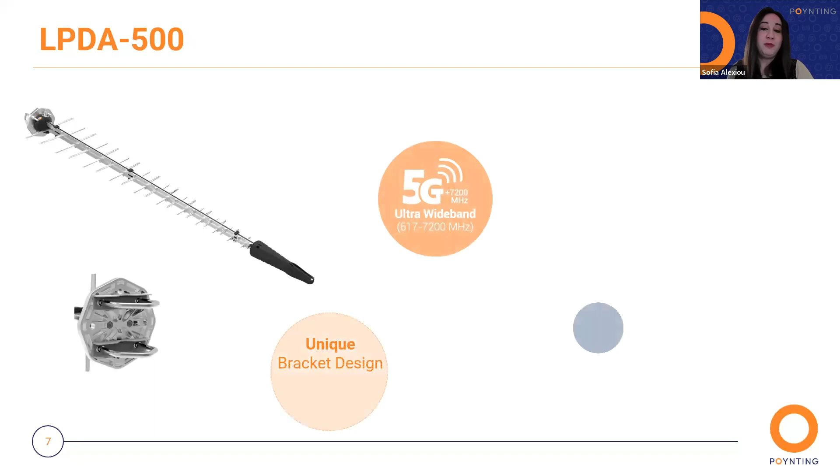Okay, so I would like to introduce you to our new LPDA 500 antenna. The LPDA 500 is a really big antenna. The LPDA 500 comes standard with a new improved mounting bracket, which can be rotated at 45 degree intervals, across all frequency bands with an 11 dBi peak gain.

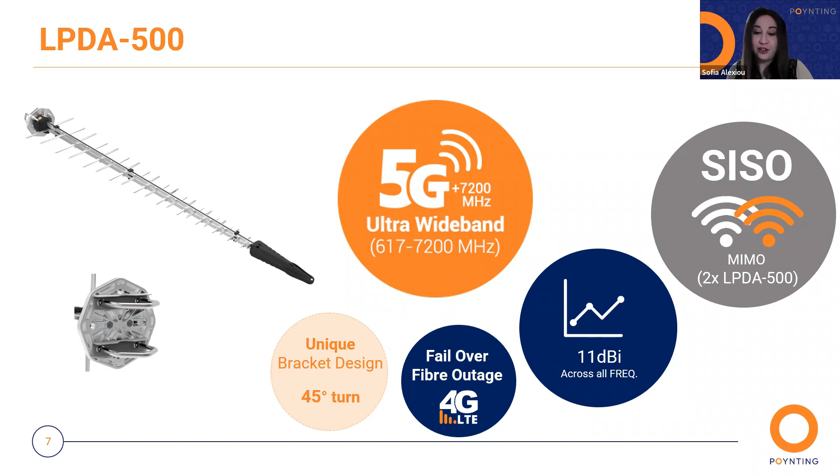So this allows easy installation, and the customer will be able to mount multiple LPDA 500 antennas and orient them in a MIMO configuration, like vertically or horizontally, or plus or minus 45 degrees. Now, Poynting antennas are well known for their design and for future-proof antennas, and the new LPDA 500 is no different at all. Okay.

The antenna applications. Which are the applications for the LPDA 500? We will talk about the main application areas. We have water wells. Think how critical the infrastructure of water wells is, and how important it is to have connectivity in this kind of application. And of course, houses and cottages in the mountains, where connectivity is always necessary. Of course, farming, agricultural, industrial and commercial LTE and Wi-Fi deployments.

Now, here we have the LPDA 500 selling points. The LPDA 500 is an ultra-wideband antenna, works from 617 to 7200 megahertz. It's a leading product with 5G. It has exceptional high gain performance over the entire frequency range.

It's mainly a SISO product, but can be converted to 2x2 MIMO by combining two LPDA 500s. Of course, Wi-Fi enabled with a gain of 11 dBi, and is ideal for failover of fiber outage caters for LTE, 4G, and 5G. And of course, the unique innovative bracket that allows 45 degree installation turns. Okay.

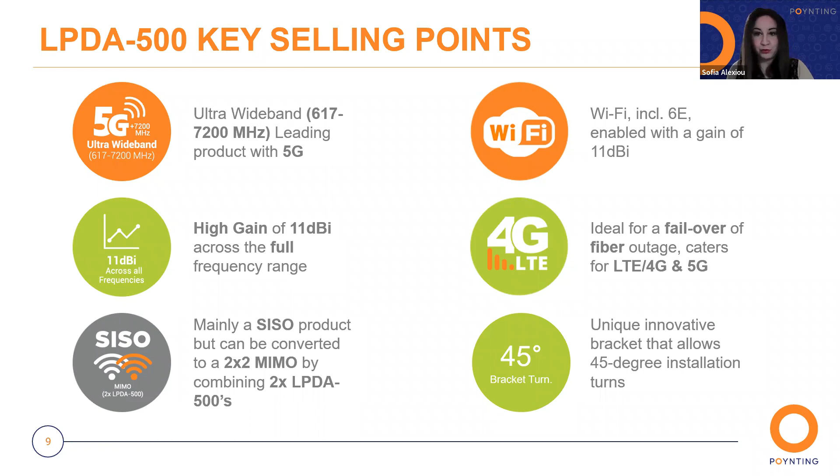Which are the LPDA benefits and features? So, our new antenna has a really flexible installation. It's lightweight and has a rugged design. The narrow opening angle reduces noise. It's long reach, it has a high data throughput, supports latency, and it's really suitable for so many technologies like Wi-Fi, cellular, LoRa, helium, and more.

So here we have the mechanical data. The mechanical data, as we can see now how really big the LPDA 500 is. The LPDA 500 is 1 meter and 382 millimeters in length. Everything is uploaded on our website, so you are able to see all the datasheets.

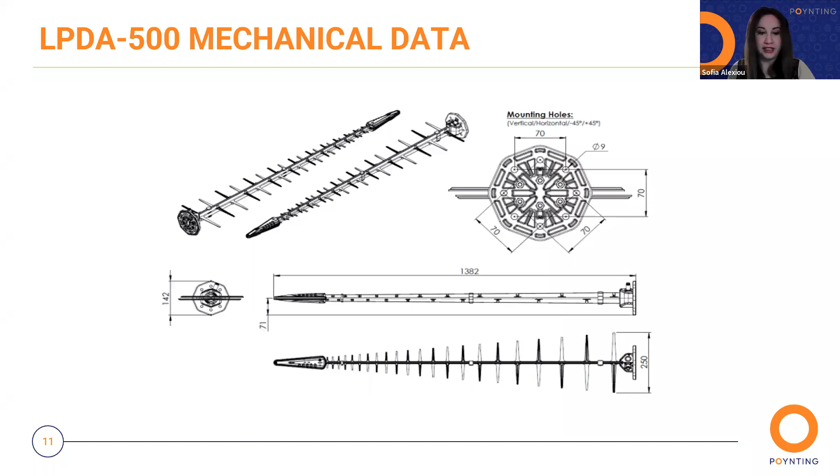Price and availability. The price for the LPDA 500, the MSRP price, is 199 euros. It comes with master boxes. Each master box contains 4 antennas inside, and yes, we have it on stock. So we will proceed a little bit more.

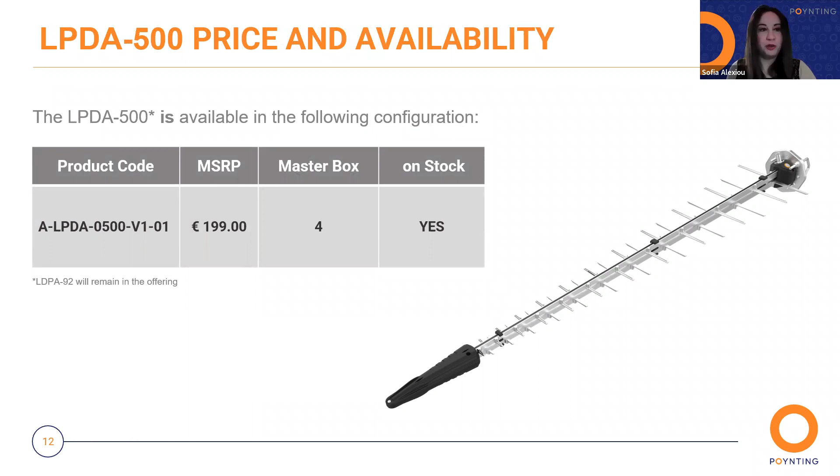And I would like now to talk about our new Omni 785 antenna. The Omni 785 is ideal for urban and rural applications. It's an omnidirectional dual-band Wi-Fi antenna which ensures a strong Wi-Fi connection with improved transfer speeds for your router or modem.

The antenna covers 2.4 gigahertz and 5 to 7.2 gigahertz Wi-Fi bands with a peak gain of 4 dBi across the bands. The antenna is ground-plane independent and can be fitted directly to any equipment that uses an RP-SMA connector. So this allows the antenna to be connected to any wireless access point, whether it's an older Wi-Fi technology or dual band Wi-Fi technology.

The antenna can, of course, be used to resolve channel saturation and provide the ultimate Wi-Fi performance and flexibility. The knuckle base of the antenna allows multiple angle deployments to accommodate the orientation of the equipment. So we will forward a little bit.

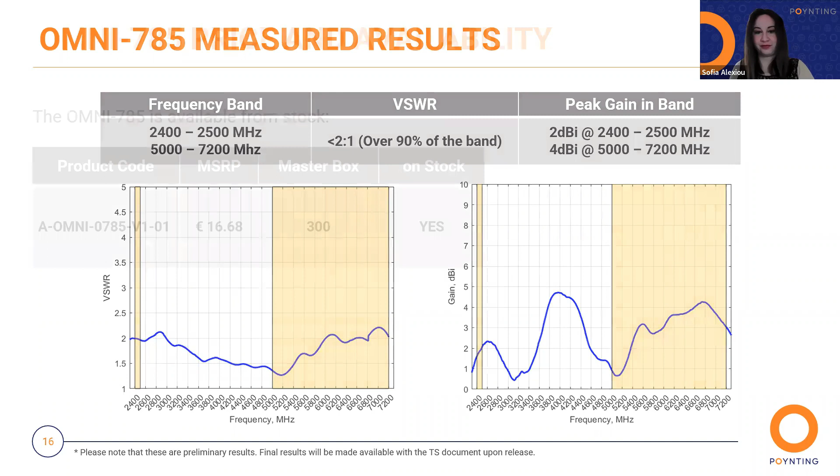Here we can see the measured results. We can see the frequency bands, the VSWR, and the peak gain. Again, these are real measured results. Regarding price and availability, of course, we have it on stock. The MSRP price is 16.68 euros, and each master box contains 300 pieces.

Now, we will move on to the next presenter, Mr. Hugo Carvalho. Thank you. Hello. Thank you, Sofia. Let me start sharing my screen real quick. Okay, you should all be seeing my screen right now, and my mic is on. Okay, good morning, everyone. I hope you're all keeping well.

I'll be talking about HELI antennas, even though I know most of you haven't done much with HELI antennas in the past. Our portfolio and the existing technological landscape were also kind of narrowing down the use cases and applications, and this means narrowing down the addressable market as well. But this is changing now.

So even if you haven't done projects with HELIs in the past, I would like you to stay attentive for the following minutes, where I hope to trigger you to think about the potential opportunities within your customer base. You might have some low-hanging fruit even in your contact list. We will address who these customers are and what projects these antennas are built for. So keep an eye out for it, because even though you haven't done it, you may do it in the future.

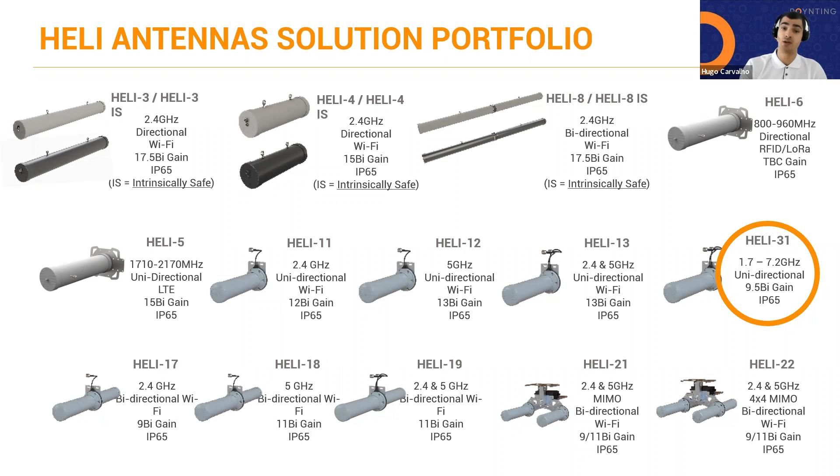The HELI 31, as you can see from this slide, was already kind of the odd one out from the traditional HELI portfolio. While most HELIs cover Wi-Fi frequencies, the HELI 5, the 6, and the 31 don't aim at only those frequencies. The HELI 31 does Wi-Fi and much more. It covers every single frequency from 1700 to 7200 megahertz, and this makes it a very appealing antenna for dual band Wi-Fi deployments whenever the Wi-Fi access point has dual band concurrent connectors, and does so all the way up to Wi-Fi 6E. So this is also a differentiator in terms of frequencies comparing the HELI 31 to the other Wi-Fi HELIs, but it also covers a lot of the frequencies where both private and public 5G networks are going to be deployed.

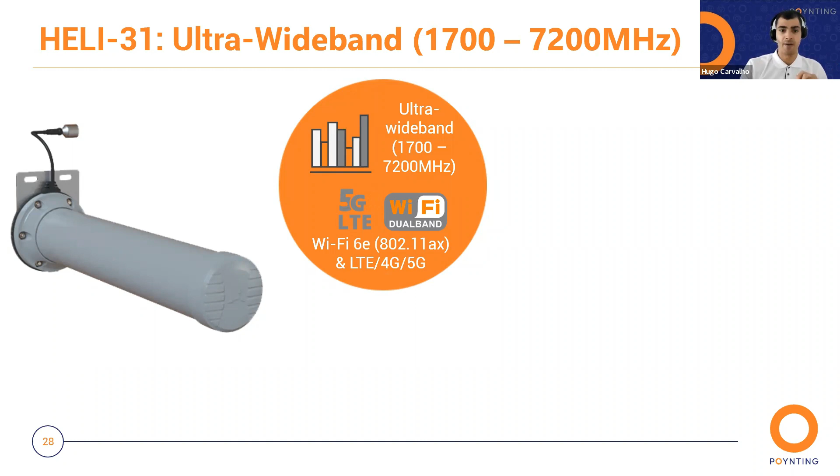As you'd expect from a HELI antenna, it is circularly polarized. This one in particular is unidirectional. You can get it in left-hand and right-hand polarization, and it's IP65 as the rest of the mini HELI antennas.

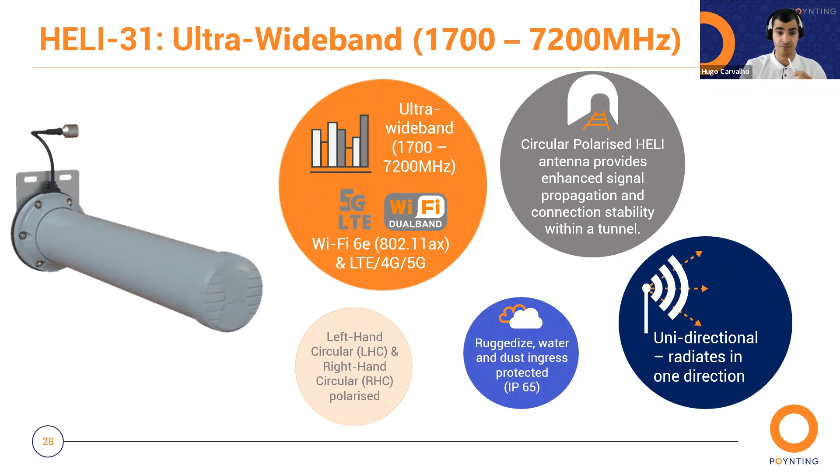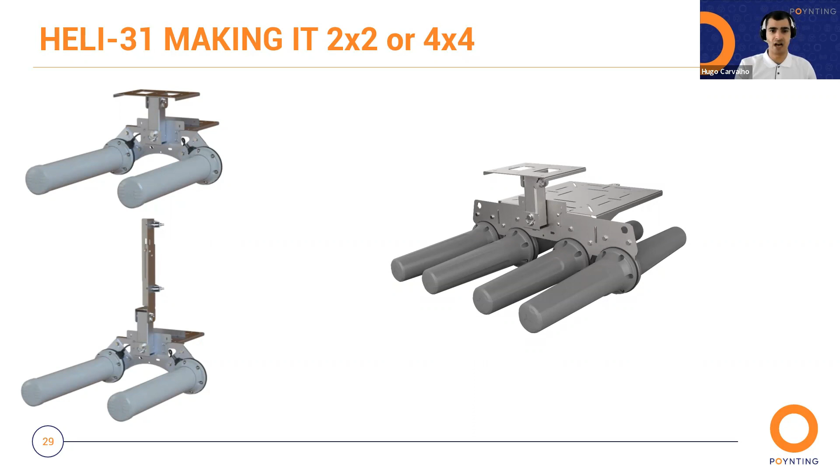It's compatible with the mini HELI brackets, and this means that you'll be able to create a MIMO setup out of this SISO antenna using the brackets 45 and 47, which you can see to the left of our slide here. You'll be able to create a 2x2 MIMO solution. But if you use the bracket 46, which we also launched a year and a half ago, you can actually create a MIMO 4x4 setup. Of course, these antennas that you see on the bracket 46 are not the HELI-31, they are the HELI-19, if I'm not mistaken.

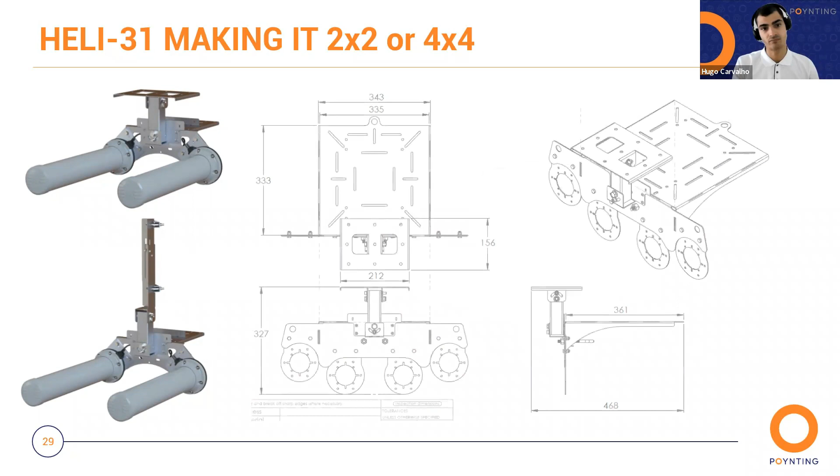In terms of purpose and key selling points for this antenna, again, it's a HELI antenna. It finds its space in the mining and tunneling vertical, meaning that we expect it to be mainly deployed in mines and tunnels, whether they're being constructed or in operation, for metro or train tunnels, for road tunnels, again, for operation or service of those road tunnels. So if it's underground and needs wireless connectivity on these frequencies, this will be a good product to solve it.

From a technology standpoint, it will be used with any radio communications that exist in the 1.7 to 7.2 gigahertz range. The most deployed technologies on these frequencies are dual-band Wi-Fi and private 5G networks. And I say private 5G networks, not public 5G, for this antenna in particular, because there are requirements in terms of power handling capacity, or in terms of low PIM, for antennas that do public 5G and public 4G deployments. And this antenna is not really there. So that's why we have the HELI-33 that I'm going to talk about in a few minutes.

In terms of unique selling points, these are, of course, circularly polarized Poynting antennas, so it is better prepared for data-first applications than leaky feeder or linearly polarized antennas. So this is the first argument, and I invite you to study, and if you want to know more, reach out to us on the differences between leaky feeder, linearly polarized antennas, and circularly polarized ones. But all in all, the technical differentiators will ensure better network coverage, leading to lower latencies, higher bandwidths, fewer connection drops, fewer access points needed, fewer points of failure, ultimately lower operating frustrations and better user experience.

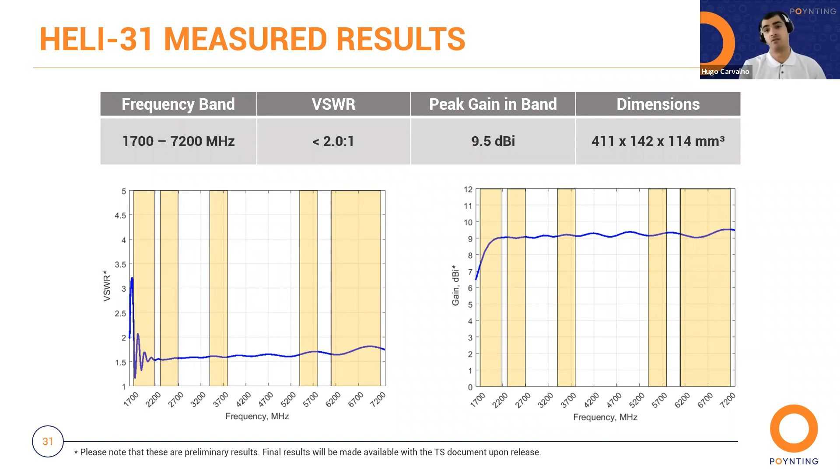And from a mechanical point of view, it's a bit longer than our traditional mini HELIs. And by traditional, I mean the 11, the 12, or the 13, the V2s, namely. So this one is 41 centimeters long, and the mini HELI V2s were 31 centimeters long. Regarding mounting options, as I said, you can mount them on the bracket 45, 46, 47, or just using an L bracket. This antenna is also a bit heavier than the mini HELIs. It weighs 1.2 kilos instead of 800 grams like the other mini HELIs.

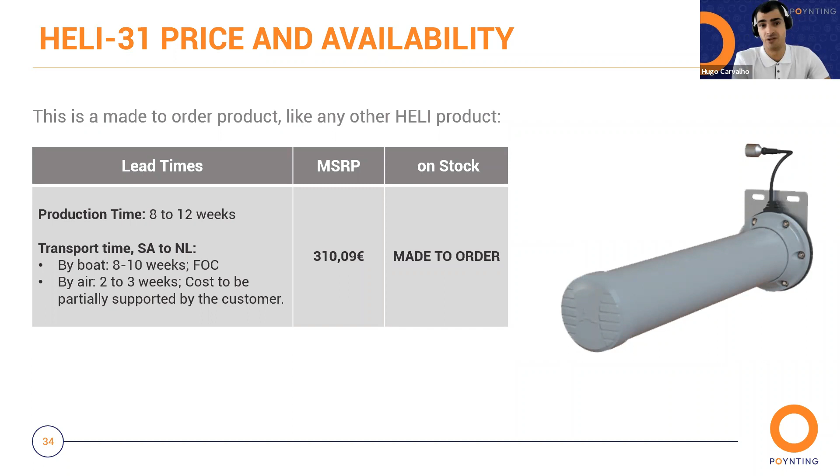Like with any HELI antenna, it's a made-to-order product and has a production lead time of 8 to 12 weeks, depending on how busy production is, on the availability of raw materials, and how long it will take us to source them. Our HELI antennas are always manufactured in South Africa. And then transport time is between 2 to 10 weeks, depending on whether we're sea freighting or air freighting them. And the MSRP is around 310 euros per antenna.

So now on to the new antenna, the HELI-33. This is still a prototype stage antenna, so this is not a fully industrialized product. We're busy manufacturing more prototypes already that we're going to test in some POCs here in Europe in the next couple of months. In any case, the reason why we're coming out to you with this antenna, and we don't want you to at any point be selling a PowerPoint, is because we have created prototypes already. We have tested those prototypes, and we are very, very happy with what we have seen. So we're very confident to let you know about this antenna and to allow you to go out there and start promoting it and creating the demand for it. We'll talk about how long it will take us to create prototypes, so you'll have the full information with you.

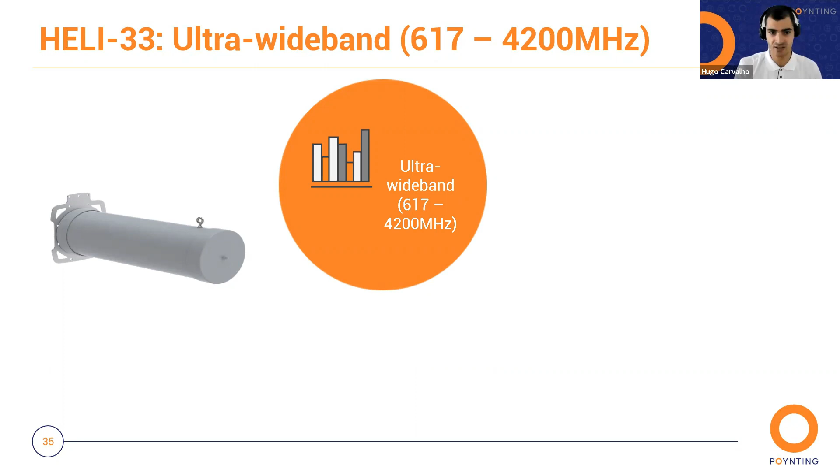The HELI-33 specifically targets the cellular frequencies. It will cover all the frequencies between 617 to 4200 megahertz. It has a power handling capacity of up to 50 watt, and it is low PIM specified. So this is it. This is mainly why this antenna is different from the 31.

The frequencies it covers, starting at 600 and not at 1700, together with the higher power input handling capacity and the low PIM specification, put this antenna as a suitable antenna for public 5G and public LTE underground deployments. This is cracking a new market for us as a company, but for you as well as a partner.

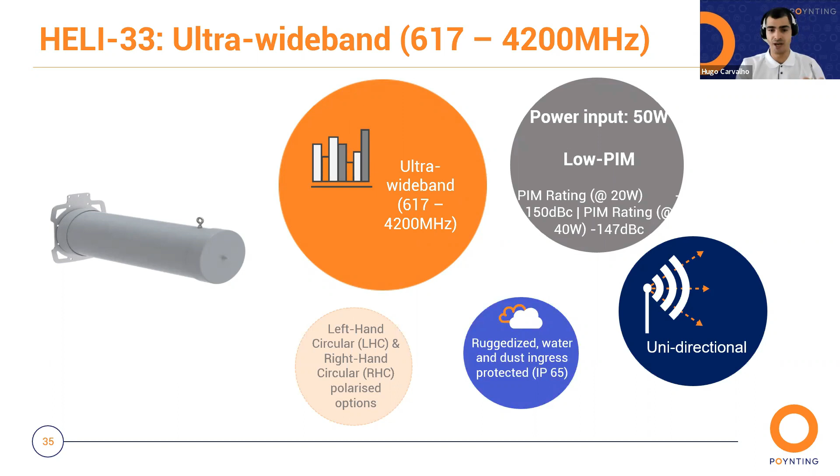Still on the antenna specification, it is a unidirectional antenna, IP65 like our other HELIs, and you'll be able to get it in left and right polarized antennas to create those MIMO deployments that we talked about before. In terms of key selling points and its purpose, the 33 has some similarities with the 31.

It also finds its space in the mining and tunneling vertical, meaning we expect it to be deployed in mines, in tunnels, road tunnels, train tunnels, metro tunnels, be it for construction or for operation or for servicing those tunnels, but now for servicing the users inside of these tunnels as well. So it can be just a regular road tunnel, and we're going to use this antenna to broadcast or provide 4G, 5G coverage along the tunnel.

From a technology standpoint, it will be used to cover any radio technology that exists between 600 and 4200 megahertz, and this means 2.4 gigahertz Wi-Fi can also be done with this antenna. LoRa can be done with this antenna, but we definitely see that the biggest market for this antenna is going to be public cellular, LTE or 5G, and private cellular, LTE or 5G as well.

Basically, same selling arguments as the HELI-31, just fine-tuned for a different market. All in all, what we need to be selling to our customers is better user experience, less frustrations, lower costs. Everything really is better when you're doing it with a HELI antenna underground.

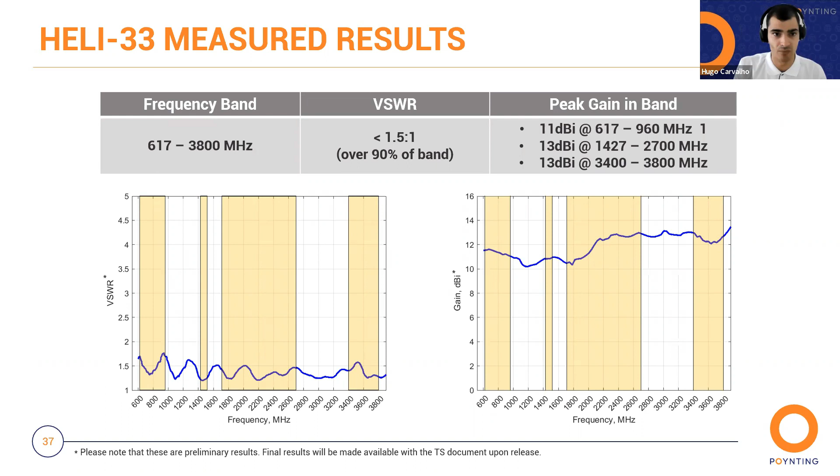Overall, a really nice antenna from our end, as you'd expect, VSWR below 1.5, and the gain, which is hovering around 11 dBi, between 10 and 13 dBi more or less, with a peak gain of 13. Radiation pattern, no news, good news, pretty much controlled. The highest gain beams from the center of the antenna.

Now, the reason why we still don't have a bracket for this antenna, a good-looking bracket like the bracket 45 or the bracket 46, is that this is going to be much bigger than our other mini HELIs. This is not going to be a mini HELI. The prototypes are 1 meter long and 20 centimeters thick or large. And we do have the ambition to create a bracket that will allow you to do a 2x2 and a 4x4 deployment, but there are a number of things that need to be taken into account.

Especially, we want to design a bracket that's going to be suitable for metro or subway installations, train installations, and this particularity adds a number of requirements like the wind survivability, and the height from the ceiling, how far you can be from the ceiling. All in all, we're still busy designing this bracket. The weight of the antenna itself also adds to the complexity of designing it. It's a 1 meter long antenna, but 5 kilos heavy.

So if you put two next to each other, then you have 10 kilos that are along 1 meter long. If you put four, then you have 20 kilos. So we're busy working on it. For the time being and for running the POCs, we have equipped the prototype antennas with the same mounting options as you get on a HELI-3. So it's still mountable today.

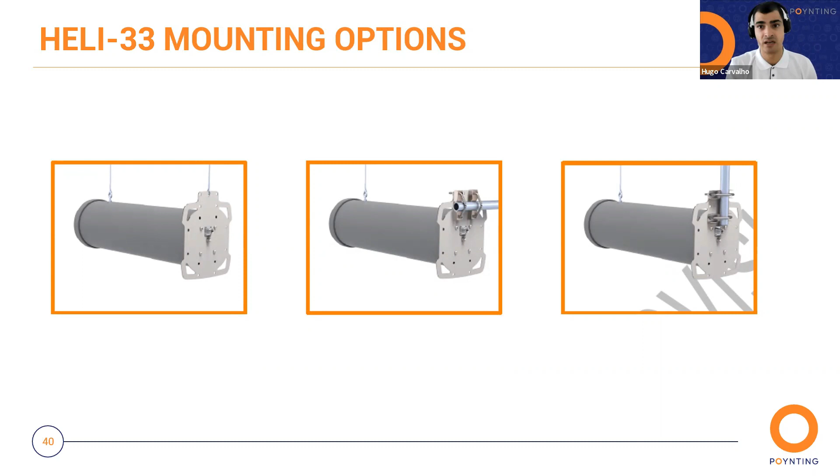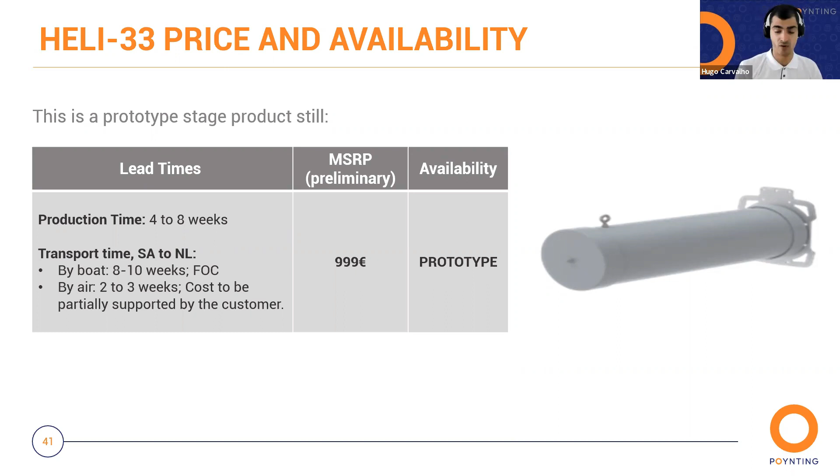You don't need to go to a local supplier to mount it. No, a pole will be good enough to mount this antenna, the prototype, and we are working on what will be the final design. This is a prototype stage product, as I said. It will take us 4 to 8 weeks to manufacture prototypes, and then regular transport times. The preliminary MSRP is 999 euros for the antenna. The bracket still doesn't have a price because we still don't have a bracket.

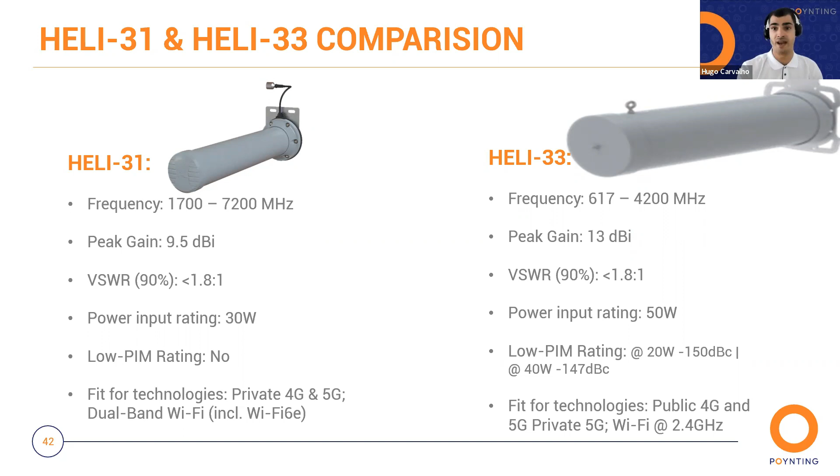In terms of low PIM rating, the HELI-31 is not rated, and the HELI-33 is minus 150 dBc for 20 watt input and minus 147 for 40 watt in power input. This makes them fit for different technologies, right? So the 31 for private 4G and 5G and dual band Wi-Fi all the way up to Wi-Fi 6E, and the 33 for public 4G and 5G, but also for private 5G and private 4G, as well as Wi-Fi at 2.4. Time to talk about the HELI-40 and the HELI-51.

First, the HELI-40, we launched this antenna sometime last year. Comes from our experience of doing multiple Wi-Fi projects. As I told you, a lot of our underground projects with the HELIs were on the Wi-Fi frequencies. And we came to realize that regardless of the great benefits that our users were experiencing by using a HELI antenna on the infrastructure side and a regular linearly polarized antenna on the end user device, meaning a phone or a tablet or a laptop, the performance was even better in terms of reliability if we were to connect circularly polarized access point with circularly polarized access point, like if we were to do a point-to-point link.

So we wanted to bring this improvement in latency and in throughput to any vehicle or any moving thing that would be living and working inside of the tunnel. And this resulted in this, we can almost call it mobility antenna fit for underground applications. The HELI-40 is our first take at it. It's a 2x2 MIMO dual band antenna. A lot of our projects are also done using the two bands, so a 2x2 MIMO dual band antenna ensures that we can cover both bands.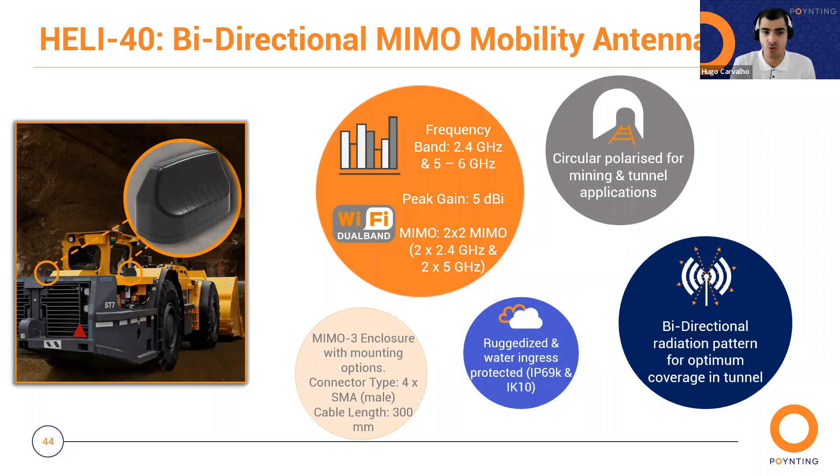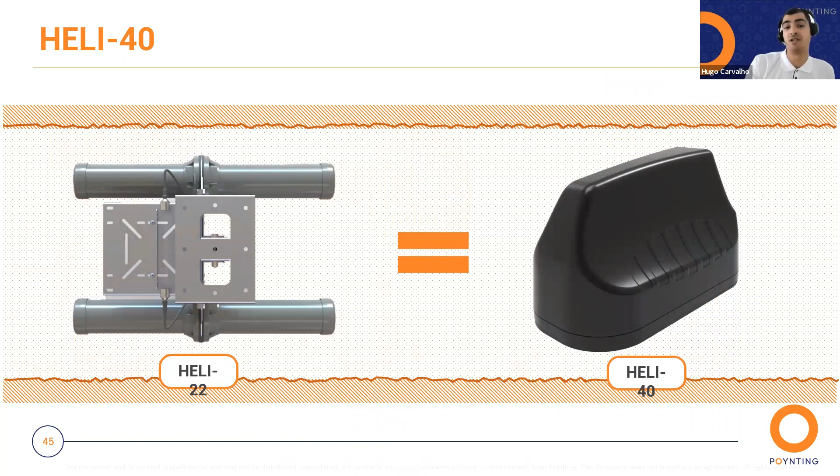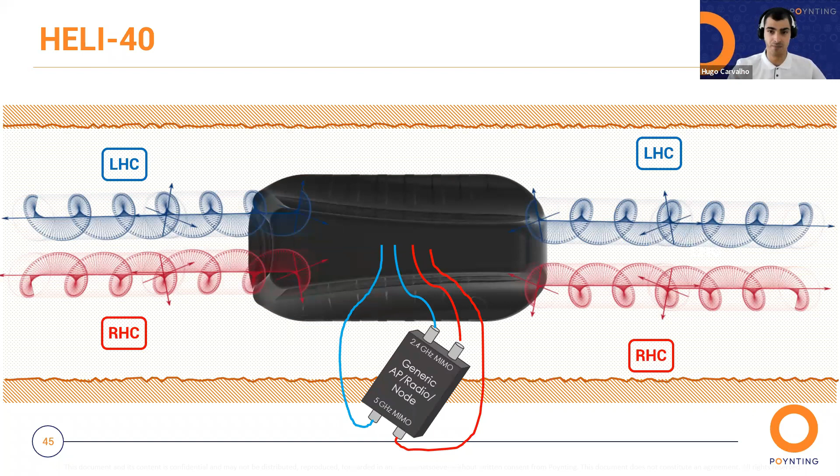So from the mechanical perspective, it looks like a MIMO 3. It works pretty much like a HELI-22, but of course in a much more compact form, which has an impact on gain and radiation pattern as you would expect. All in all, same principle of operation. 4 connectors. These ones are SMA M and not N type like with the HELI-22, but 4 connectors, and then the antenna transmits the beams to its front and to its back. On the 2.4 gigahertz, a brilliant VSWR below 1.5.

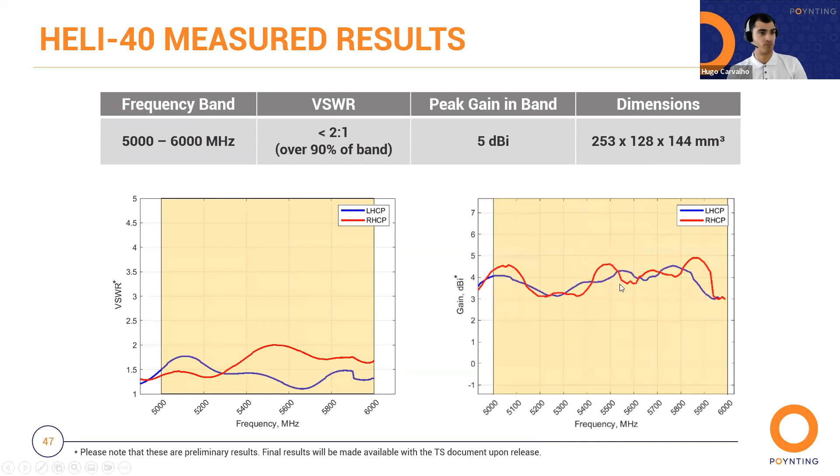This one is correct, the table and the plots actually match the table. Again, a peak gain of 5 dBi, almost flat around 4, and a VSWR that stays below 2 for the better part. Here we have the radiation pattern of the antenna. No big surprise. Bidirectional antenna with classic Poynting, well-controlled radiation pattern.

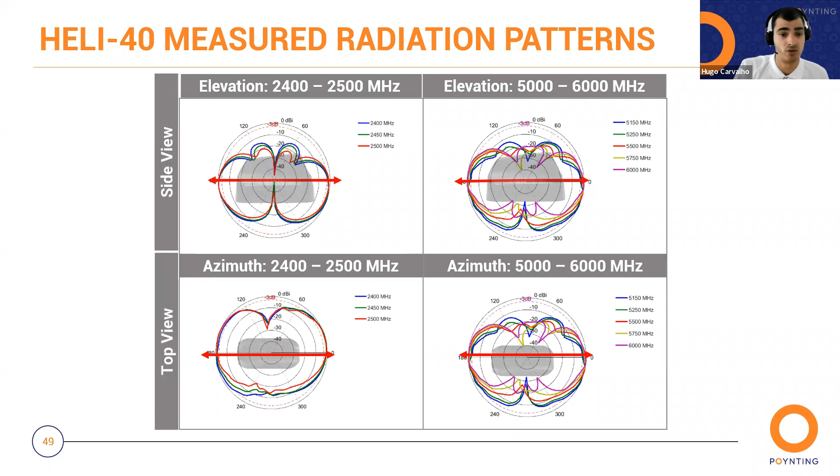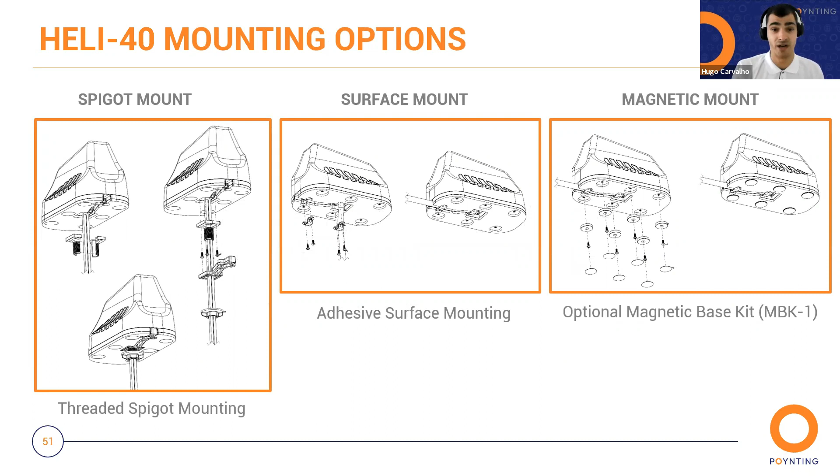From a mechanical perspective, if you have seen a MIMO 3, which I'm sure, and I know you did already, you know what to expect and what to count with, be it in terms of weight, size, be it in terms of mounting options, as well as accessories out of the box. In terms of lead time, regular Poynting HELI antenna. In terms of price, it's priced at 347.75 euros MSRP.

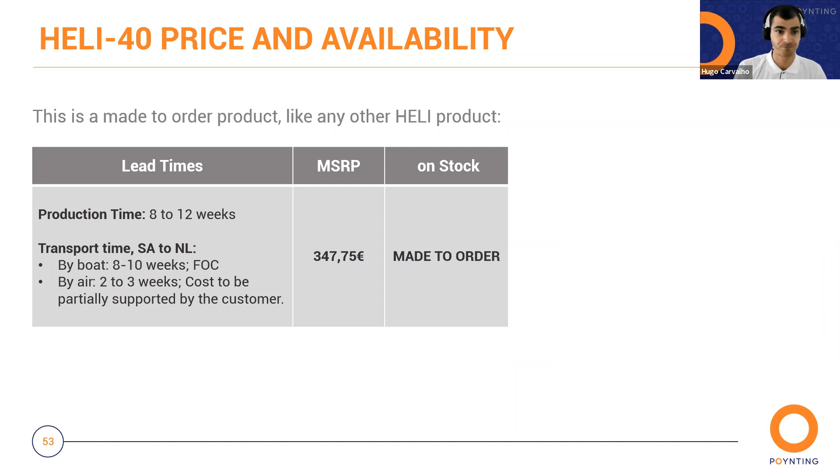Again, as I said, the purpose of this antenna, and just kind of to summarize it and to wrap it up, the purpose of this antenna is to connect routers and access points and all kind of radios which live inside of a vehicle, machine, truck, rolling stock, whatever it is, which is traveling inside of the tunnel.

But this antenna, and I've done this with Birger in the past, we've considered this antenna for other tunnel deployments, can be considered for tunnel deployments where the size and the shape of the regular HELI-22, for example, are not suitable because it's too big, or there's no space, or we want to have kind of this vandal-proof design, the ruggedness that the MIMO 3 shaped antenna brings. So it was designed for a vehicle indeed, but it may be considered for fixed locations if that's what you need at that point.

As with respect to selling points, better connection between vehicle and infrastructure, lower latency, higher bandwidth, less connection drops, ultimately a better performance overall, with more stability on the connectivity. You can use, because this antenna is a bidirectional antenna, the radio, which is inside of the vehicle, as another point to your mesh network, if a mesh network is actually what you're deploying underground. So that's also a nice selling point for this antenna.

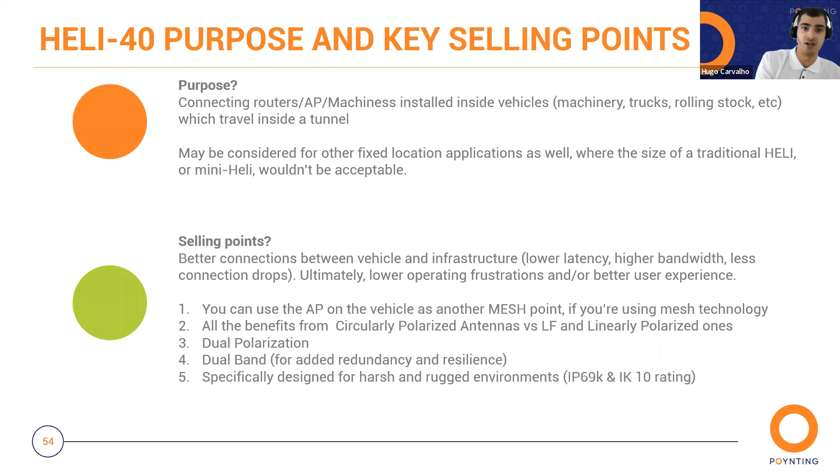To wrap it up, and because I'm pretty much sure you had enough of HELI antennas, I want to mention the last antenna, and this one is new, already a product, not a prototype. This is indeed already a product. And it's our second mobility antenna for the HELI series or the mining and tunneling application. This one is rather simple to explain now that you fully understand what the HELI-40 is, because it shares the same concept. A HELI antenna built and designed to be installed on a vehicle.

The HELI-51 is a 2x2 5 gigahertz only antenna. So this is the first big difference between the 40 and the 51. And it is a unidirectional antenna instead of being a bidirectional antenna like the 40. Other than that, pretty straightforward, circularly polarized, left hand and right hand inside of the same enclosure. The mechanical aspects of it, it's pretty much the same thing as the MIMO 3 and as the HELI-40.

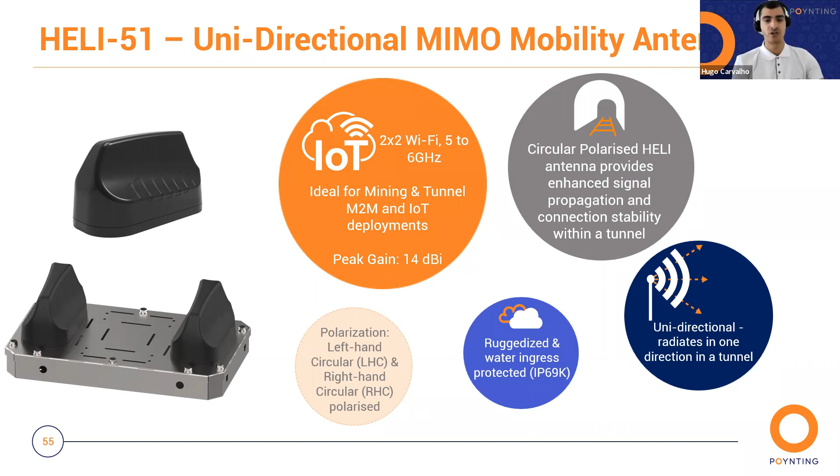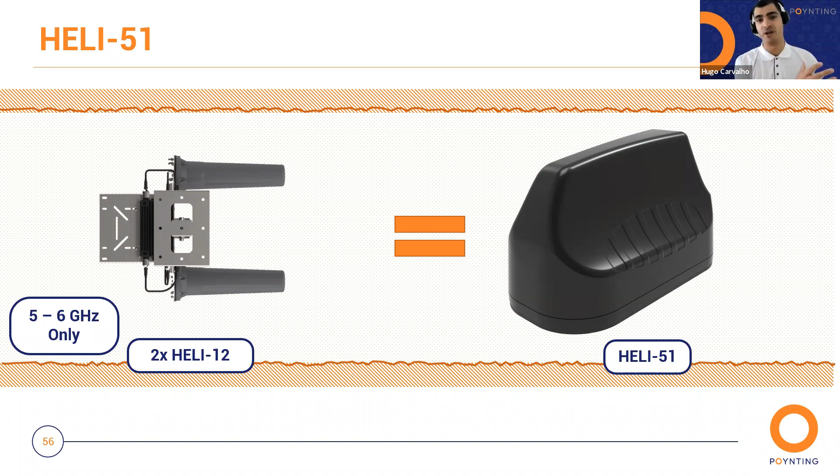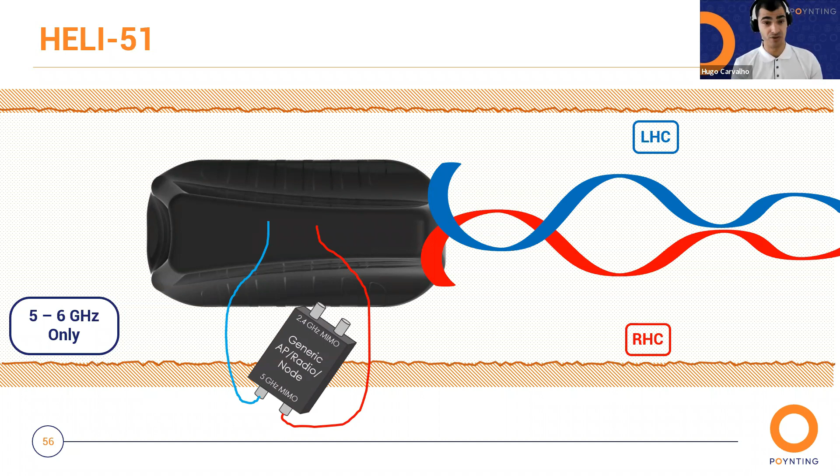And that's it in terms of brightness. Same thing with the HELI-51. It would be more or less the same thing as getting a couple of HELI-12s, adding them to a bracket 45 and deploying them. So what you end up getting is an antenna that sends two beams, one left-handed circularly polarized and one right-hand circularly polarized into a given direction. 5 gigahertz only, as I said before. Two connectors, SMA male, and that's pretty much it.

A very good VSWR below 2, and again, that averages around 11 dBi, I would say, across the band with a peak of 14 dBi. So here you can see another difference between the 40 and the 51, namely for the 5 gigahertz, which is, of course, the frequencies that this antenna covers, a much higher gain. And of course, this has to do with the space we have inside of the antenna and what we could do, and the requirements, of course, that existed when we designed it.

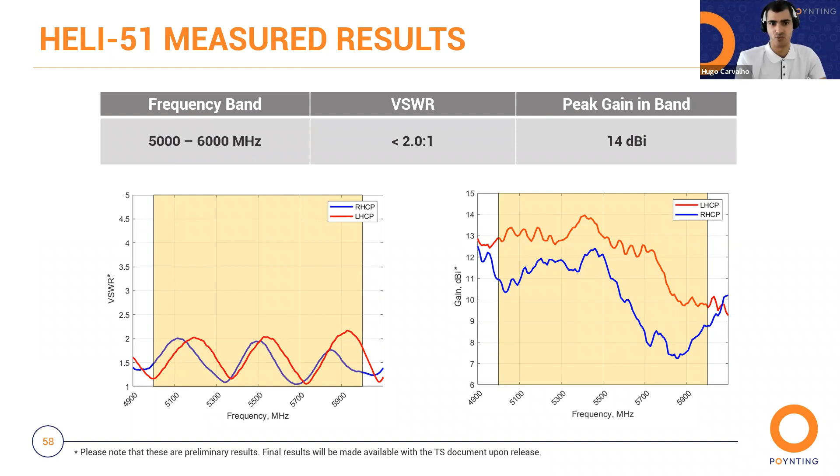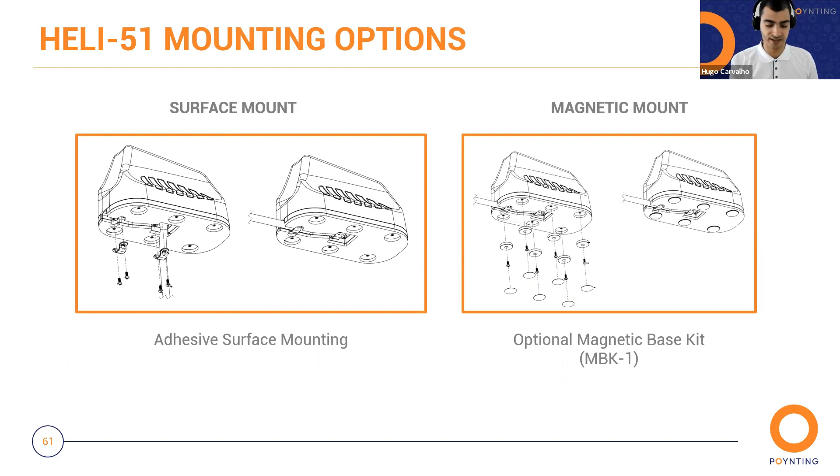Unidirectional antenna, beaming to the front of the shark fin design. So when you're installing it, make sure that you're facing the narrower end of the antenna to where you want to see the beam coming from. In terms of mounting options and accessories, it's not as fully equipped as the HELI-40. It just comes with the adhesive surface mount, and there's the optional magnetic base as well, but we sell the other accessories on the side.

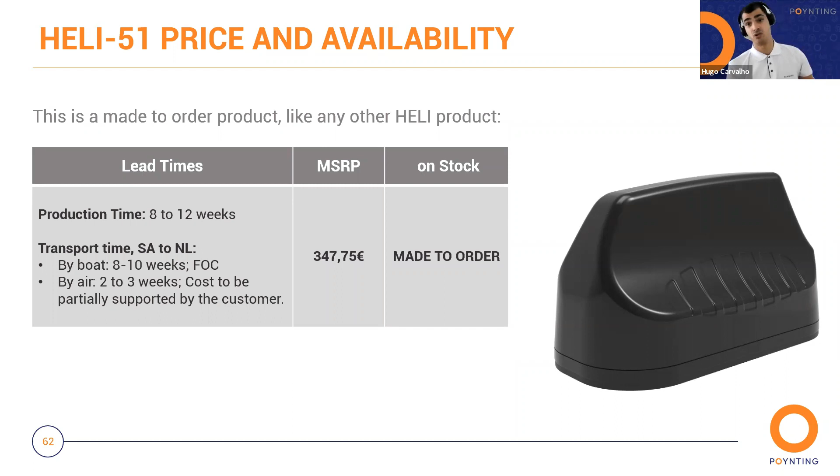Price-wise, it's priced exactly at the same price point as the HELI-40, and availability-wise, it's the same thing as HELI-51 or any other ELI. Made to order, 8 to 12 weeks to manufacture it, and then transport 2 to 10 weeks, depending on how we choose to go. The purpose of this antenna is pretty much in line with what the HELI-40 was, but it was designed for vehicles that do work in underground environments.

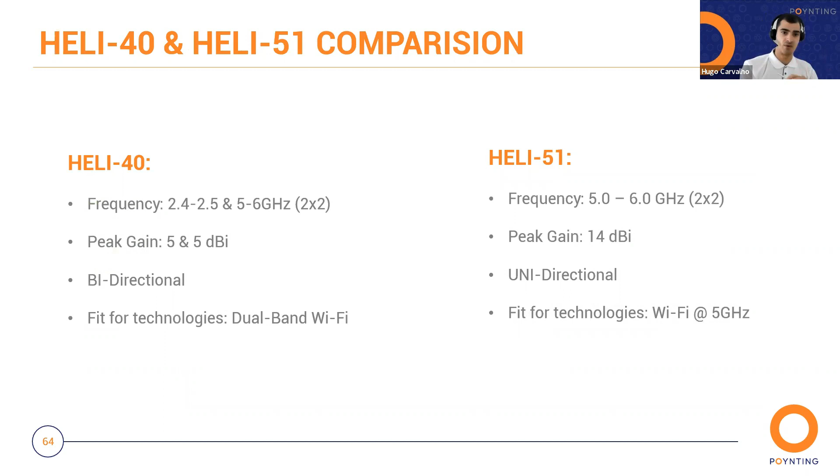Big difference is, of course, this antenna is not bidirectional, but directional only. It has all the benefits from a circularly polarized antenna and a higher gain than the HELI-40. And these are basically the differences between the two: the frequencies that they cover, the gain that they have, and one being a bidirectional and the other one being a unidirectional.

A final word on the ELIs. We're working on an ELI antenna certification program to make sure our ELI antenna partners have a grounded understanding of this line of products. And this will still take some time from us. So until then, feel free to come to us and discuss any projects you may have an eye on, any support you may need to prepare some outreach to your customers, to get more comfortable with the selling arguments and the technical aspects of the ELI antennas.

And if you remember correctly, I said that you may even have some customers for this product in your customer base. And the customers who we believe would have an interest in these antennas are system integrators doing Wi-Fi, system integrators doing private 5G and LTE, and everyone is writing those buzzwords, private 5G, private LTE. So you'll know who they are because they're probably quite loud about it for the time being.

Infrastructure installers, and this was a customer base that we were not addressing, or at least not in a very active way. So people who are installing the base stations for the operators. For the better part, they're the same guys, the ones that do tower installations, but also underground installations. So these guys, you can target them as well. MNOs and service providers, the operator itself. If we can tell them that they could be providing better service at a lower cost inside of the tunnels, I'm pretty sure they will be willing to listen.

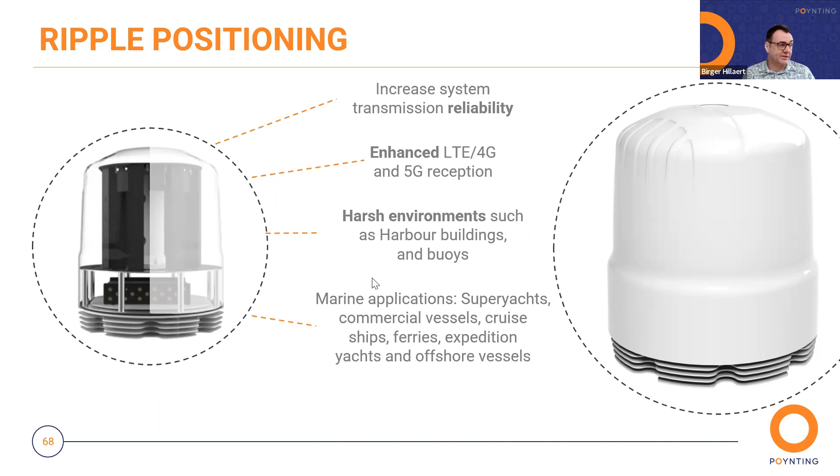So why Ripple? What we have seen in the maritime market is that there's more and more demand for higher bandwidth. A nice catalyst for this was, of course, COVID, where we saw that people had to stay on the vessels for very long times, missing friends, family, etc. So IMO, the International Maritime Organization, decided to create a maritime law that a minimal internet should be available for the crew, for crew welfare. So that really is a catalyst.

So people are really looking at more resilient, more stable, and higher bandwidth solutions on 4G, 5G, and other solutions. So we create a higher bandwidth solution within an IP65 enclosure. Flexible solution on cable management, because we've all seen the evolution from 4G to 5G. And this meant going from 2 antennas to 4 antennas. From last year's installations, more and more of these standard installations go to dual 5G, 5G meaning 4 antennas, dual 5G meaning 8 antennas.

Imagine pulling cables over 10 to 15 meters, but then times 8. It's not only expensive, but also very time consuming. And we all know that long coaxial cables will induce more loss than short coaxial cables. So one of the key selling points is that it's high bandwidth within a budget-friendly solution, which means it will cost money, but the total solution will not be that much more expensive. We have some comparison charts on normal antennas with cables versus a Ripple with all the antennas inside. So we are happy to discuss that.

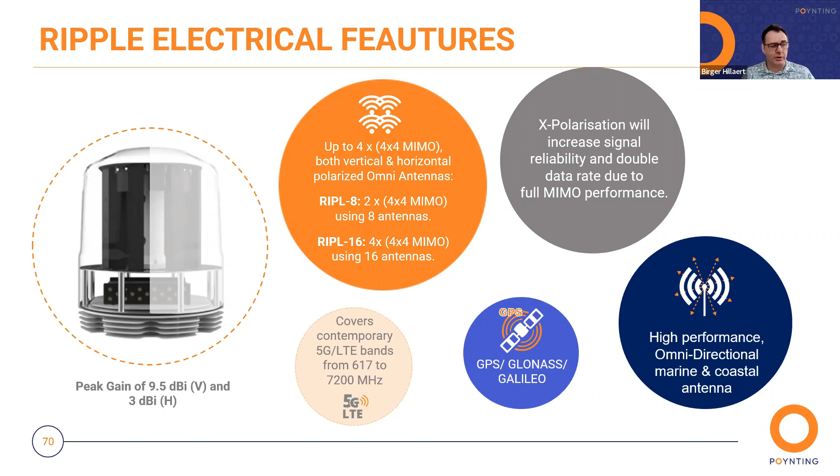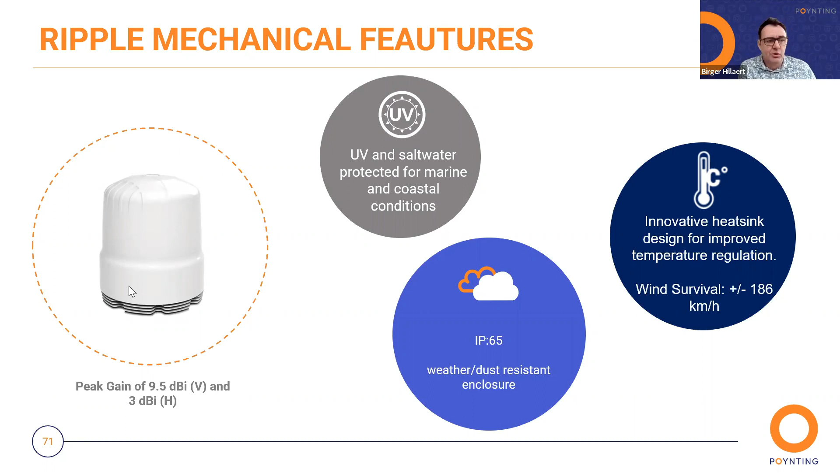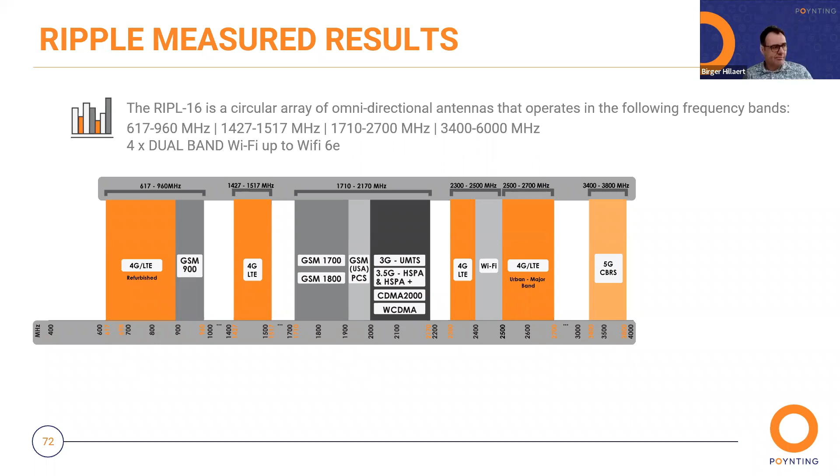And of course, it's always nice to see Ripple measured results in comparison to a lot of brands, also really renowned brands. We do measure our results. Everything you see in our technical documents are measured results and not simulated results. This is something we see a lot, but it is very hard to compare simulated results to real life. So we give measured and honest results. What you see is what you get. So you see the Ripple here inside, you see a router compartment where you can fit in the routers.

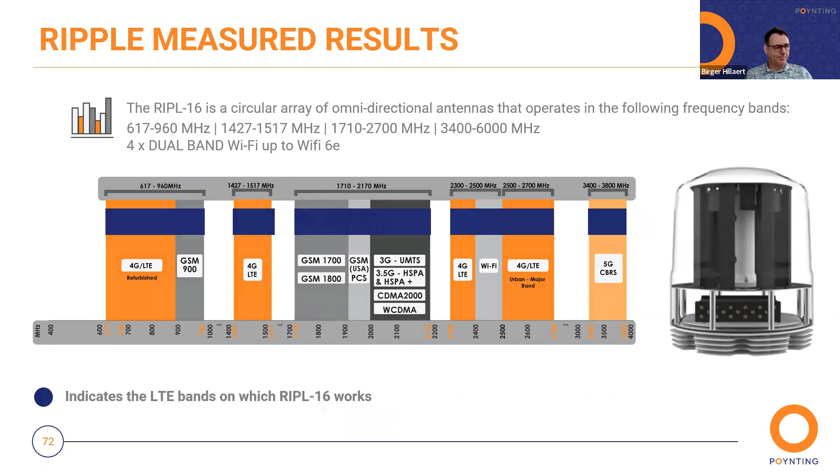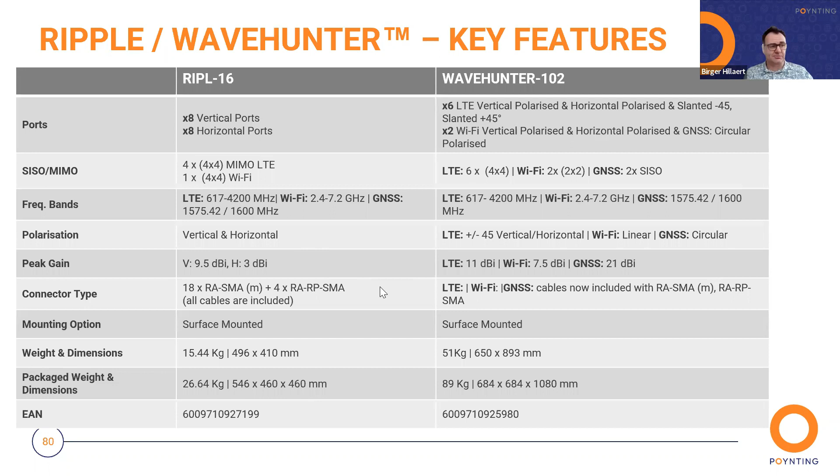So, big difference, Ripple and Wave Hunter. This is something which will be explained much more in depth by Hugo this Thursday. So, of course, in a Ripple, you can combine 4 5G modems, and in a Wave Hunter, you will have 6 5G modems. That means you aggregate the bandwidth of 4 5G modems compared to 6 5G modems. There you can make a difference in bandwidth, of course. The Wave Hunter will reach further because of its higher gain. It uses directional antennas with higher gain than the omnidirectional antennas that are in Ripple.

Wave Hunter also has a superior signal to noise ratio. Why? Of course, it is inherent to the use of a directional antenna that it only looks in one direction, so it could only catch noise from one direction. And compared to an omnidirectional antenna, which looks 360 degrees, it can, of course, see noise from everywhere. So Wave Hunter will have a better signal to noise ratio because of the directional antennas inside.

And then Ripple 8 or 16 is much more budget friendly, and this is where we really had very good feedback at SMM Hamburg in September 2022, the biggest commercial maritime show in Europe, probably in the world, where the integrators really said, okay, we can work with that, with this price point and the time saving, and of course the quality of the product. We can really work with this in the commercial maritime market. And we also had this feedback from shipping companies that this solution is really acceptable.

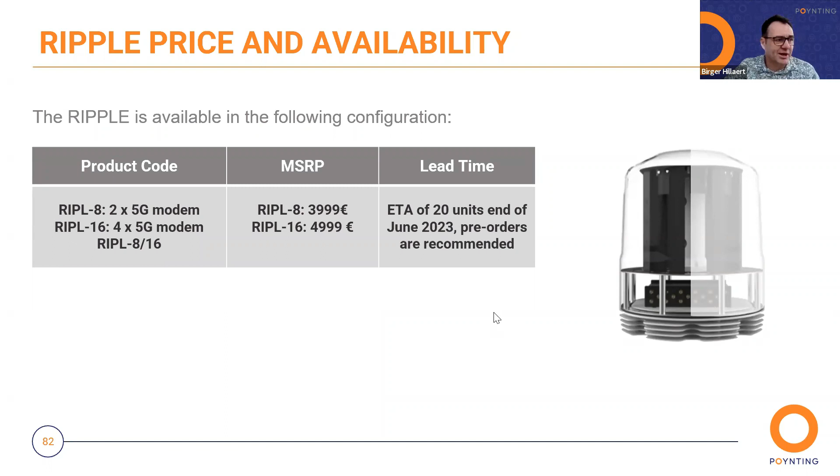Be fast, and about 70% of that will be Ripple 8, and then the rest will be Ripple 16. So be responsible, take stock, take pre-orders, because these things are made to order, and we will try to have some stock in Europe, but we've seen the reaction at SMM, we've seen the feedback in the market. These things will go fast. I think we're dropping the bomb here with this product in the commercial shipping market. So yeah, reach out to your customers and make sure that they have availability on the Ripple. So that's all from my point.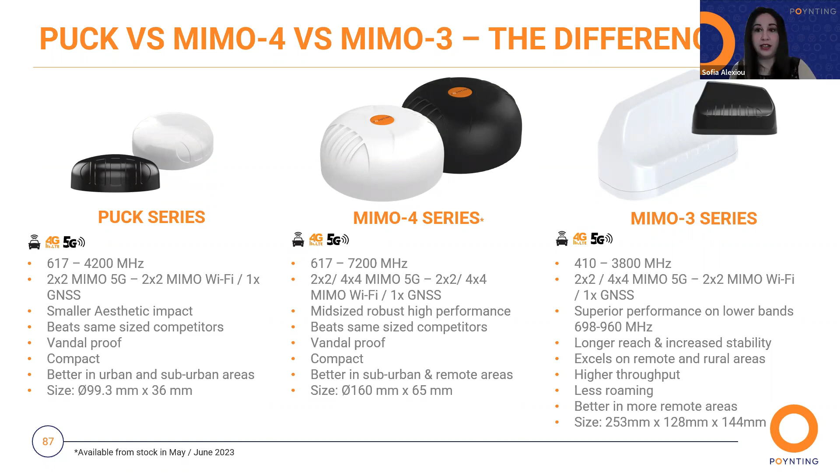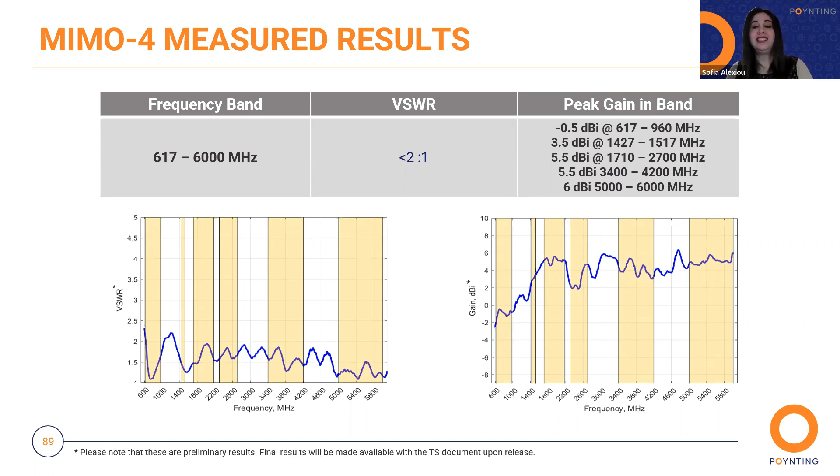Again, we have always measured results. Here we can see the cellular measured results, which indeed have an excellent performance. Here we have also the cellular measured radiation patterns, and the MIMO 4 exceeds the performance of most competitors due to the attention to the design of this high-performance antenna. The radiation patterns of all radiating elements provide an excellent balance between omnidirectionality, pattern diversity, and good radiation abilities at the desired elevation. This is very important, especially for the transportation and marine market.

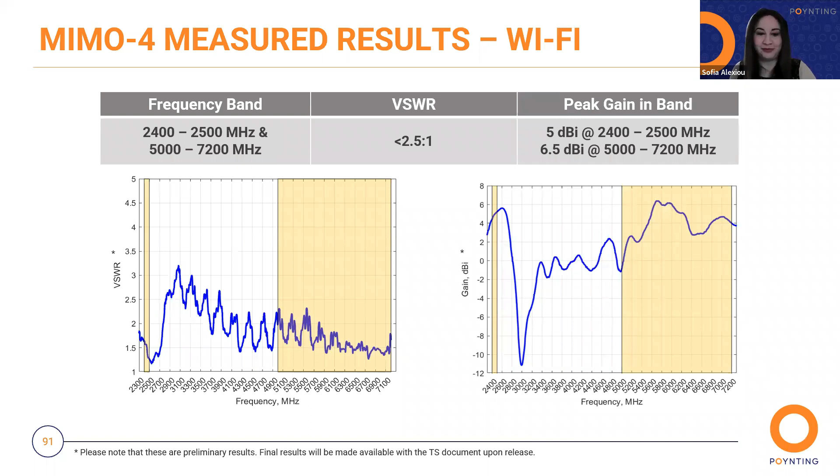Here we have again the measured results. Here we can see the Wi-Fi results, frequency bands, VSWR, and peak gain in band, which are also excellent results. Here we have the measured radiation patterns for the Wi-Fi, where we can see at the azimuth plane that we have a constant omni pattern across all frequency bands.

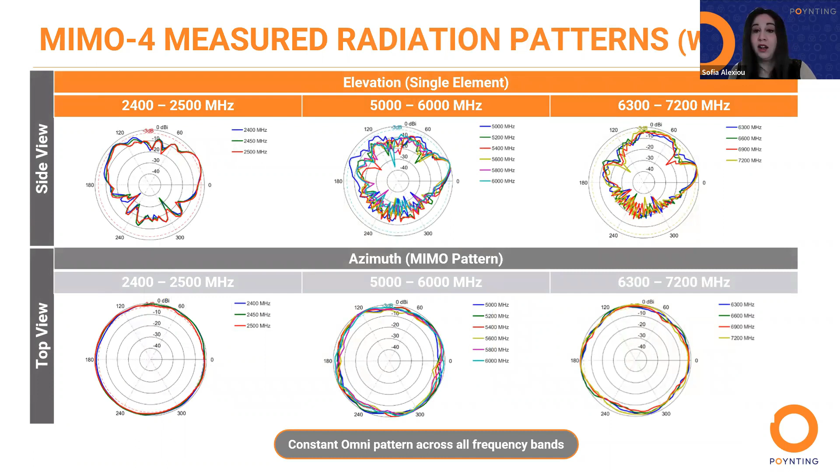We will forward a little bit more, and here we have the mechanical data. Everything is already uploaded to our website, so you can download it and see all the data sets for the MIMO 4 series. The antenna height for the MIMO 4 is 64.89 millimeters, and the diameter is 160 millimeters. So we compared before the MIMO 4 with MIMO 3 and Puck. We can say then this is true, so it's smaller than MIMO 3 on height and bigger than Puck regarding the diameter.

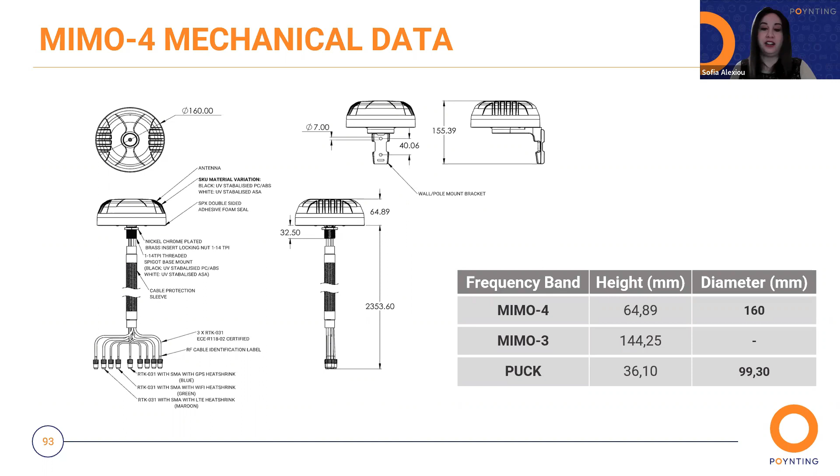Price and availability. We have 3 different MIMO 4 product codes and also the color option. So we have the MIMO 15, and the MSRP price is 195 euros. It comes, of course, in master boxes of 8 pieces, and the availability will be in May and June. We have the MIMO 17, the price is

245 euros. MIMO 19, the MSRP price is 295 euros. And as I told before, each master box has 8 pieces of MIMO 4. So you are able to pre-order now because we expect stock by May or June. Also, it's very important to say that the MSRP price for the magnetic mount is 45 euros, and we're expecting these mounting options in May and June as well.